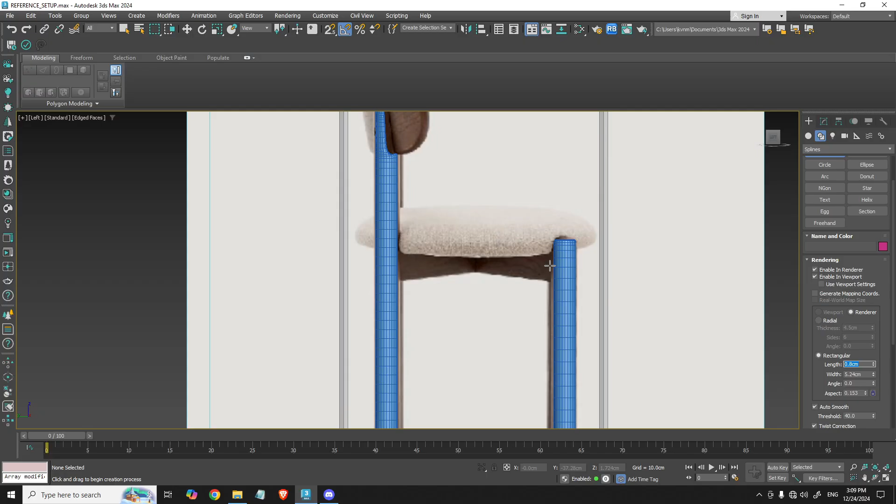I will just go on the left view or on the front, basically wherever you like. And I will take a line, which I have set to be on rectangular, at 0.8, and I will drag this up until a point, let's say here or whatever, doesn't matter.

I will go on the top view and I will turn on the angle and I will leave this on 45 degrees. And I will place this somewhere right here. Maybe you can increase the length at 1, maybe 1.2.

We don't want this to be a perfect match, so it doesn't really matter. It won't be much visible anyway.

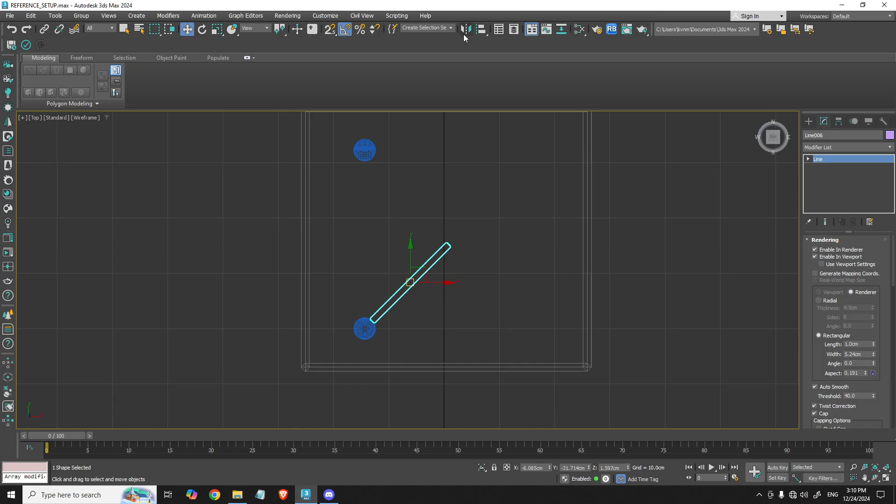And now one more thing you need to do is that you need to create another one for this part right here. So in order to do this, you can just select the mirror option up here, and instead of no clone at the x-axis, go for copy.

And drag this up until the point this meets our geometry, right there. And of course you can then go and maybe manually bring these two closer.

Pretty simple, right? Something like that, basically.

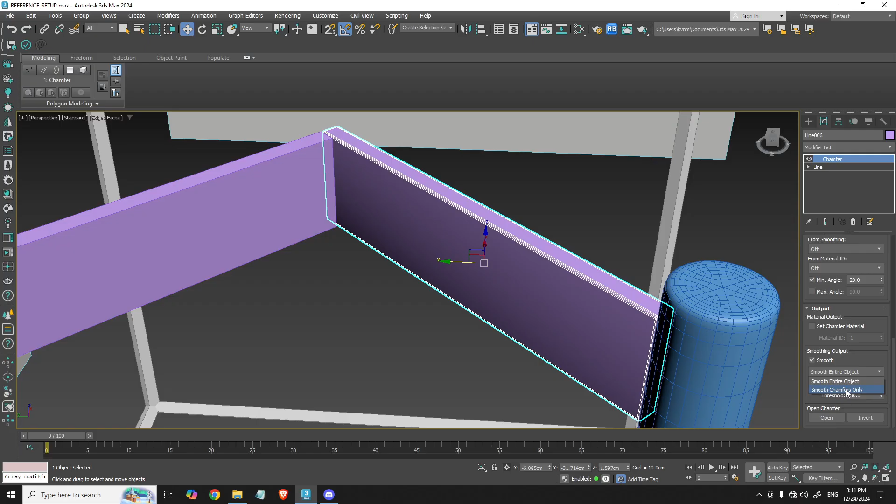And I will, of course, then add a chamfer, because we don't want this to be just a flat surface. 0.2 maybe, point. Add some extra segments and also set the smoothing output to smooth chamfers only.

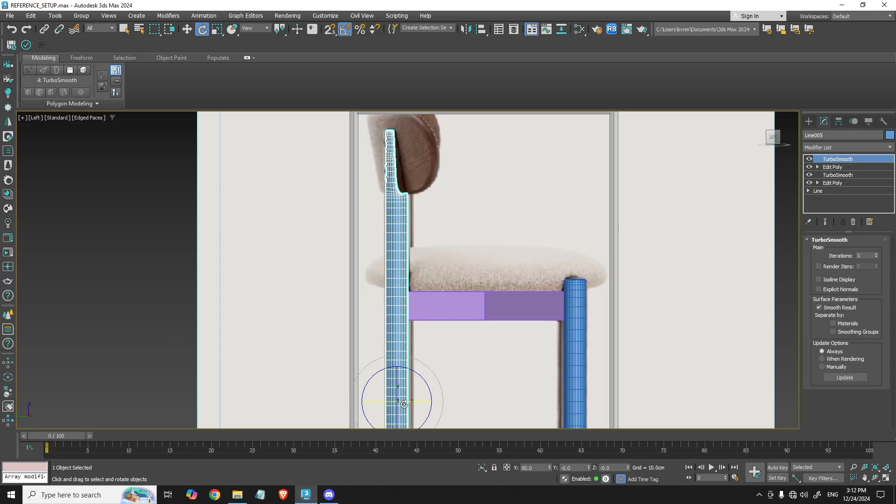I will just right click and copy this, and I will paste this right here. Alright, one more thing. I want to go on the left view and rotate this, actually on the front view, and I want to rotate this at 45 degrees, so this part looks like that.

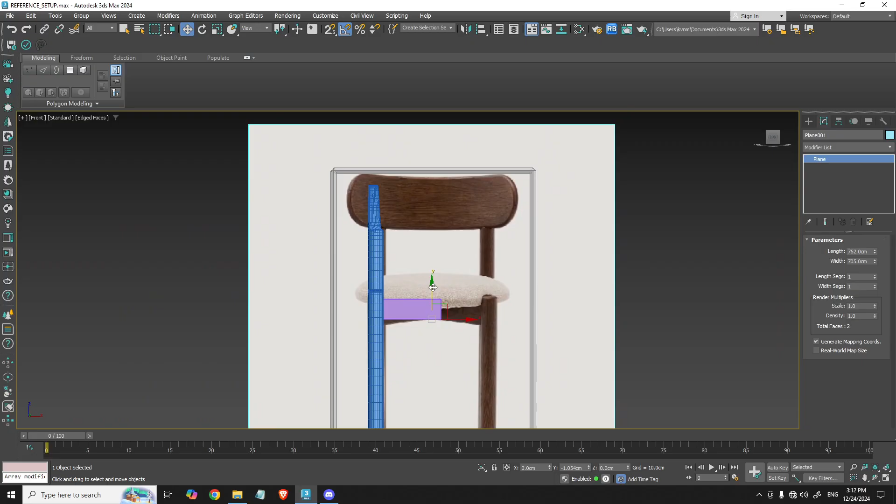So we are at 45 right here. And actually, we need to bring this image lower, something like that. And maybe we could... no, let's leave it as this.

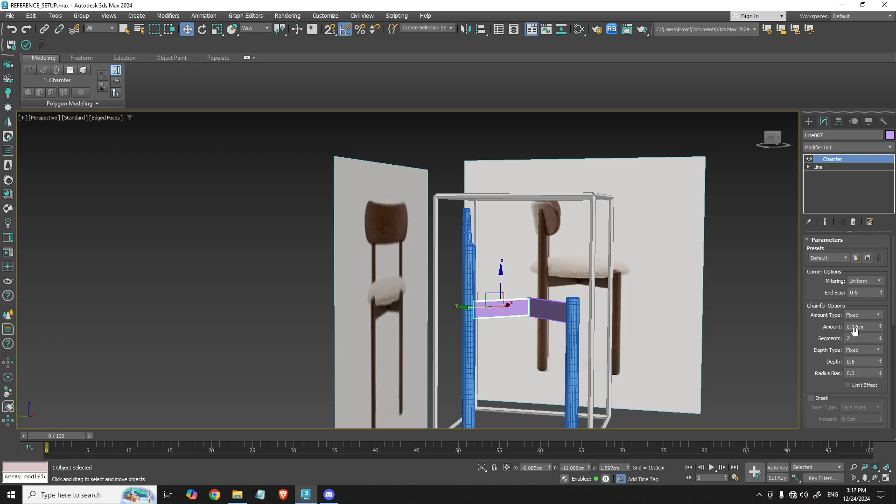Yeah, actually I will make this thicker, maybe at 6. All right.

And then you might wonder, what are we going to do with all of that? Well, I am going to select them and I will mirror them. Once again, I will keep a copy at the x-axis and I will move them

to right to match right here, and I will manually take this one and bring it right here.

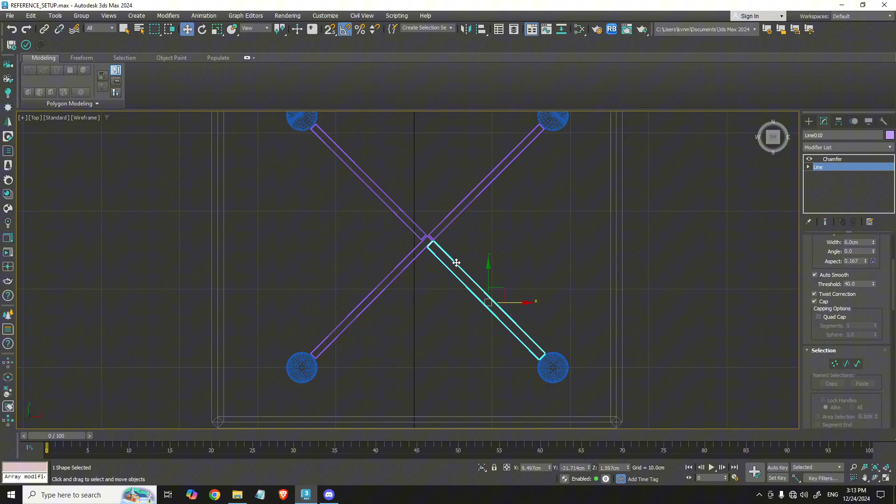Now I'm pretty sure that's not how this is manufactured as a furniture, but it doesn't really matter because no one would be able to see this connection right here. So don't worry about that.

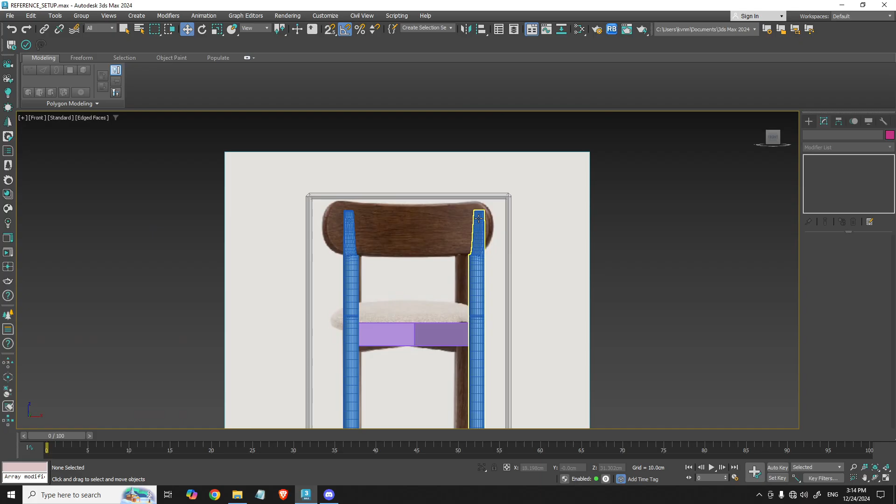And now let's move on with creating this, the back of the chair. So this is pretty simple.

I will just take a plane and I will add few extra edges on it. I will increase the width, something like that. And you might have guessed it, we will use a Turbo Smooth.

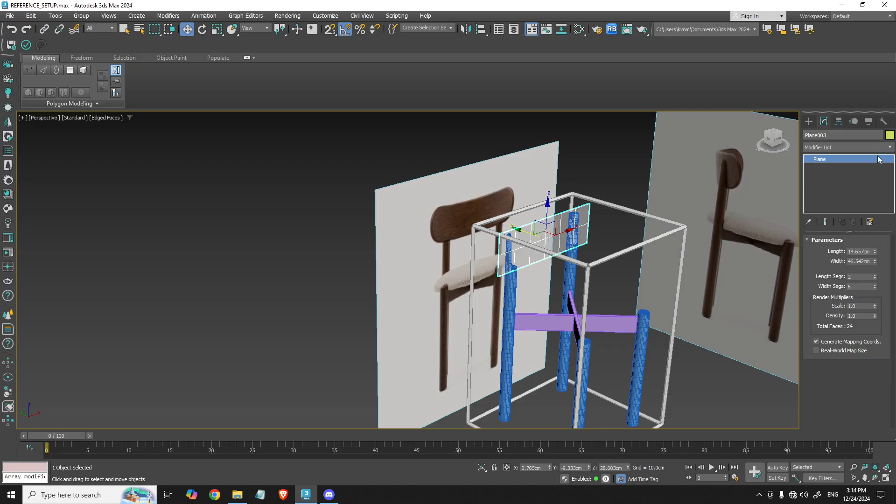But before the Turbo Smooth, we will actually go and apply a bend modifier, which we need to do some trial and error to find where we want it to go.

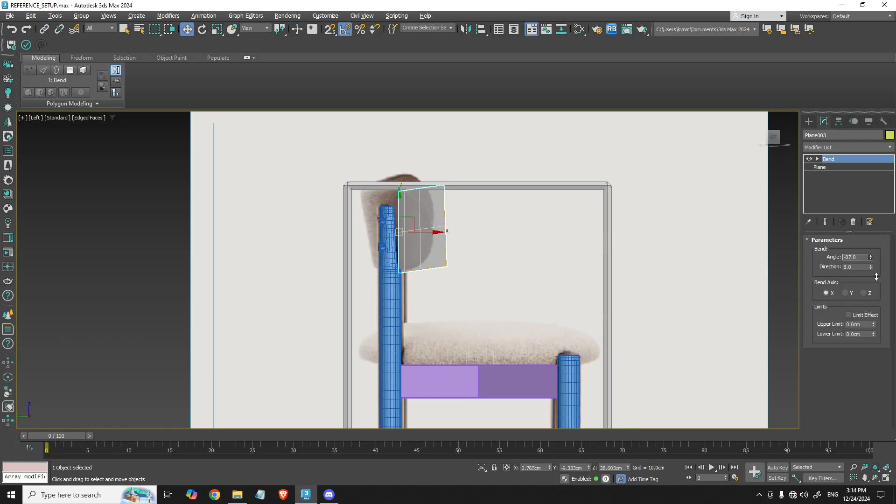I always get confused with the bend modifier. Maybe rotate this a bit, something like that.

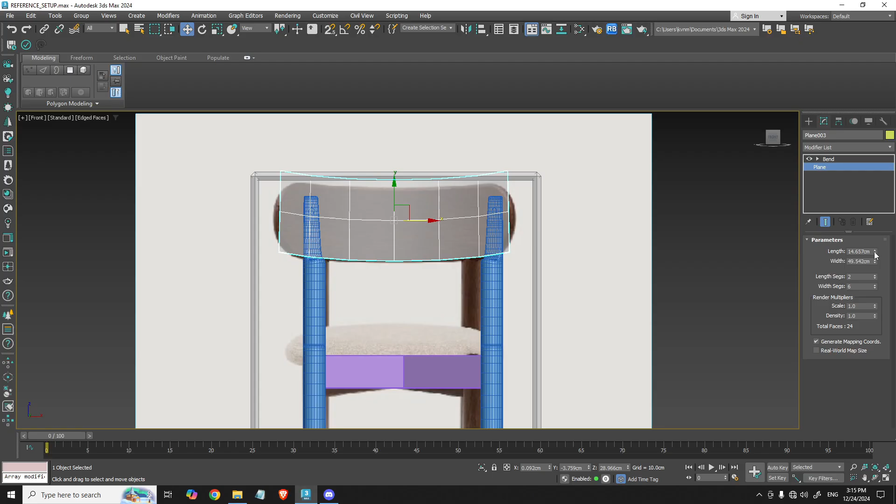Yeah, I think we are pretty close. But we need to make this bigger. I think something like that.

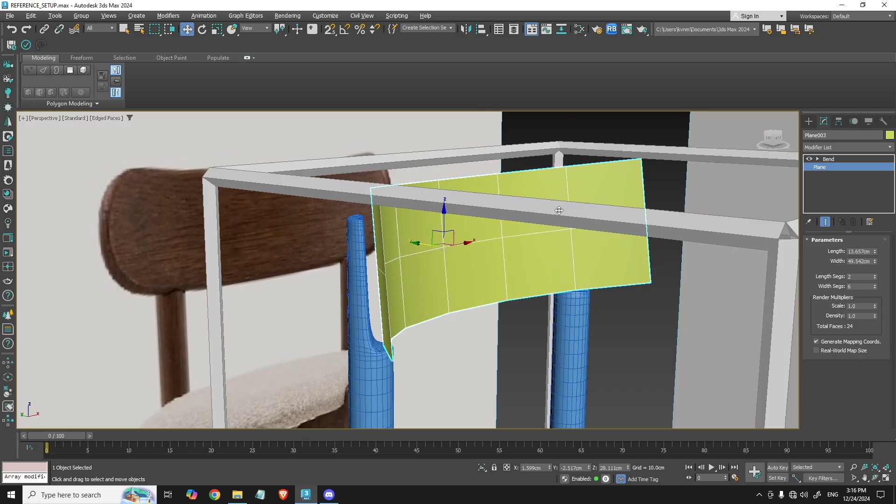Here we go. And I will actually go and apply a turbo smooth, and as you can see, nothing significant, nothing important changed.

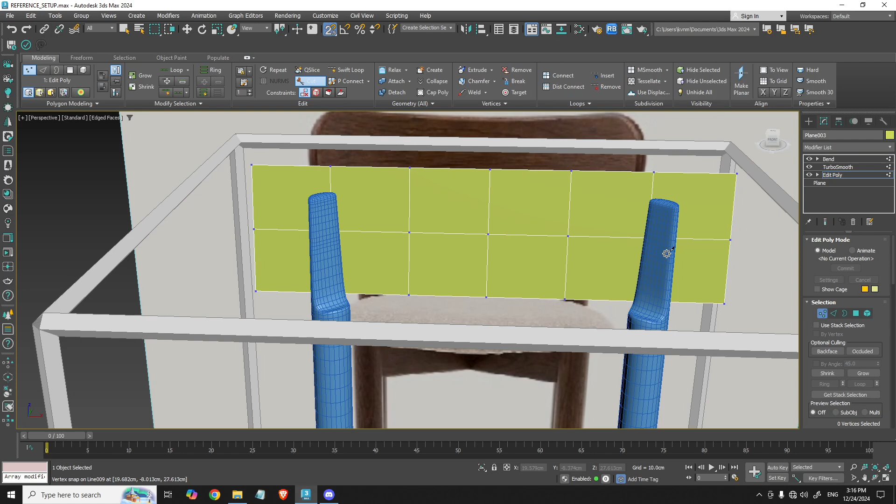And I will add an edit poly, because what I want to do is to go right here, connect them to help turbo smooth do its job correctly.

So turbo smooth, as you can see, it got fixed, but right here it looks like we missed something. Yeah. Let's target it

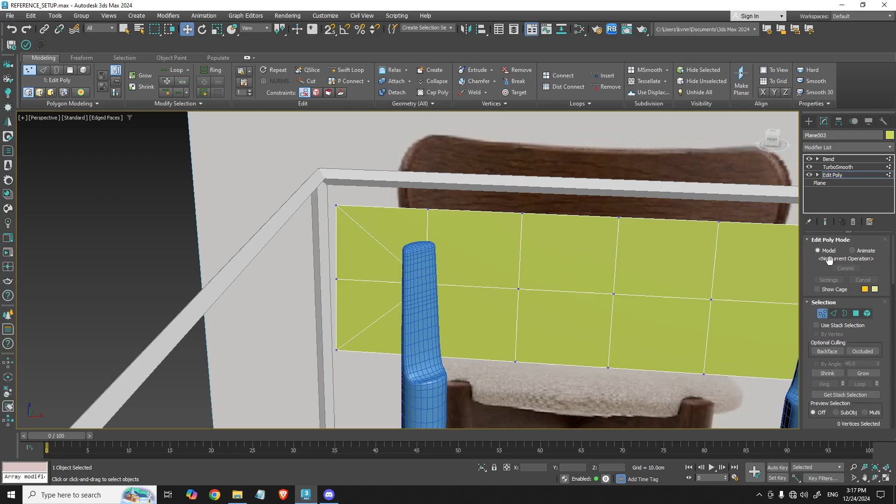there. Yeah, bend. Make sure to deselect the vertices. Bend.

And then maybe you can just apply a Shell modifier.

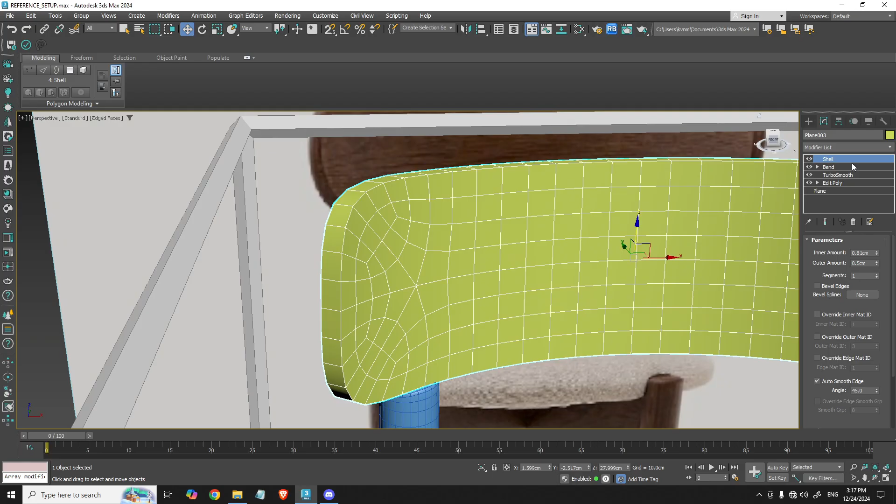And do something like that. What will happen if we apply turbo smooth now? No, I don't like this result, so let's keep this turbo smooth at 2.

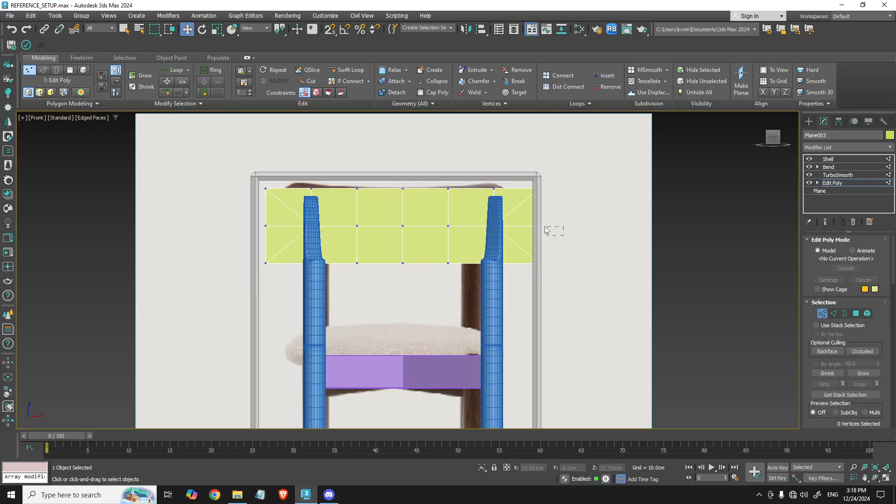I will manually go and fix a few things, like we want this part to be a little bit on the outside, just like that.

Okay, and I will go and apply a chamfer modifier, 0.1. Also, don't forget to fix the min angle so we can remove this part. Okay, let's make sure everything is correct. All right.

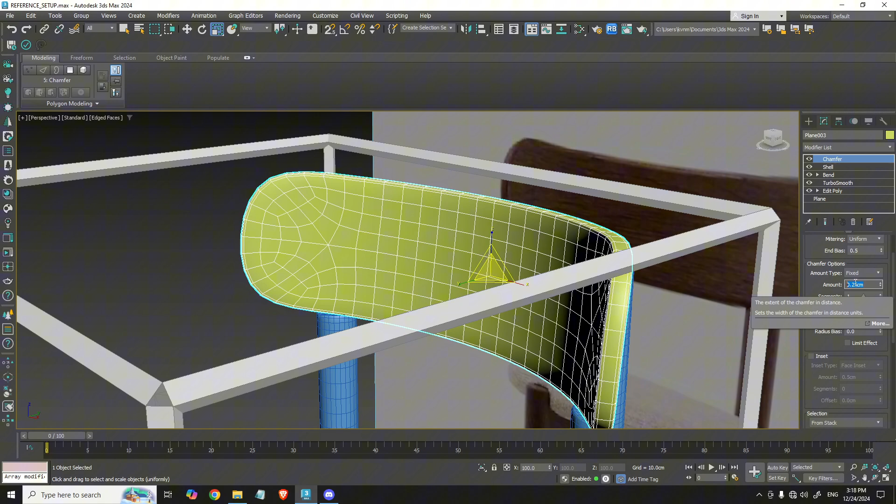Maybe 0.25, 0.5, 45. Yeah, I think this is better. Add some segments. Smooth chamfers only.

Of course, we can go and add some extra thickness to this, and move this down just a bit.

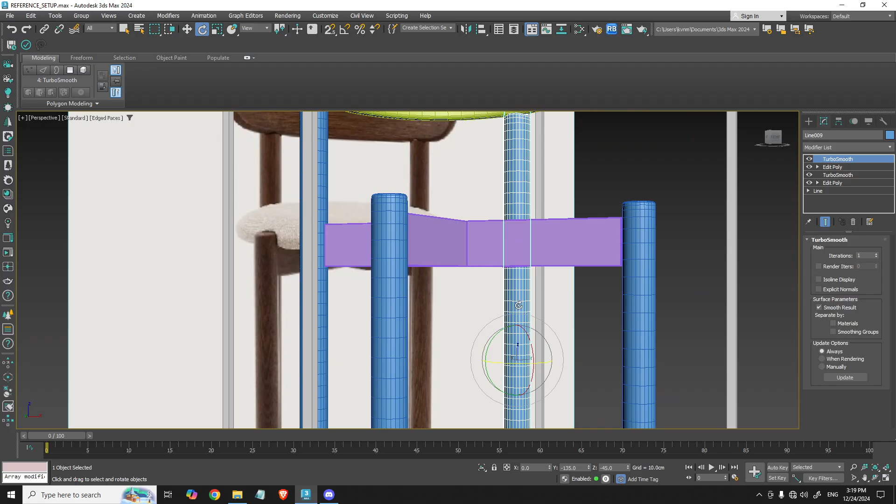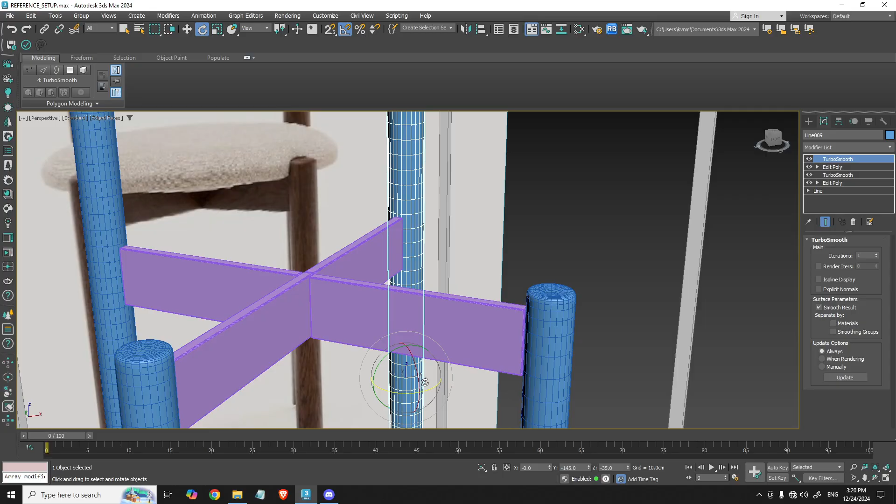Maybe we should actually cheat a little bit and rotate this, let's say right click at 5 degrees, maybe, or 10, 15. Yeah, that's better. 5, 10, 15.

So just like that, we also got the back ready. And now it's time to create this seating.

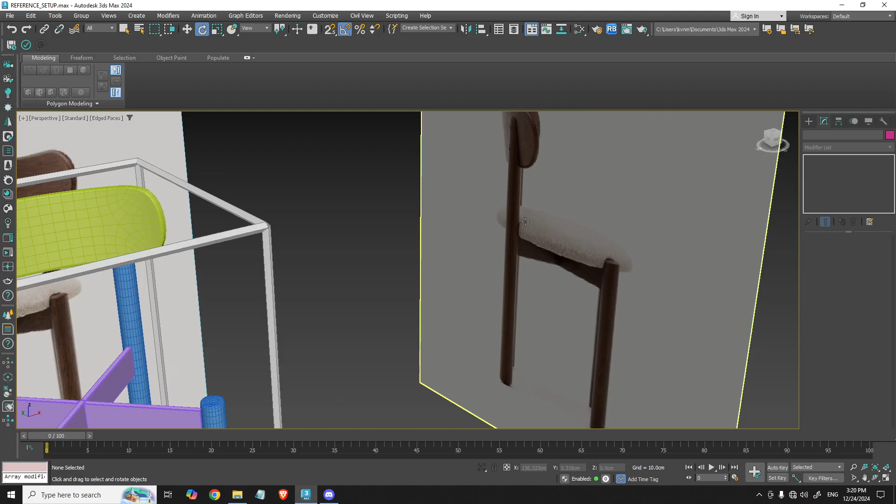Now this is pretty simple. I will go on the top view. I will take a cylinder, I think. So right here, I went on and created this seating because it turned out to be a little bit complicated, but I managed to do that. So here's how I did it.

So basically, it's just a circle. Here we got an edit poly, and then a turbo smooth on top of it. And if we go on the original circle, just one circle with 3 steps. So let's go and create it from the beginning.

Right here you can see how it looks. So I will just hide this. I will go on the top and I will go right here on the splines. I will take a circle and I will position it on the center.

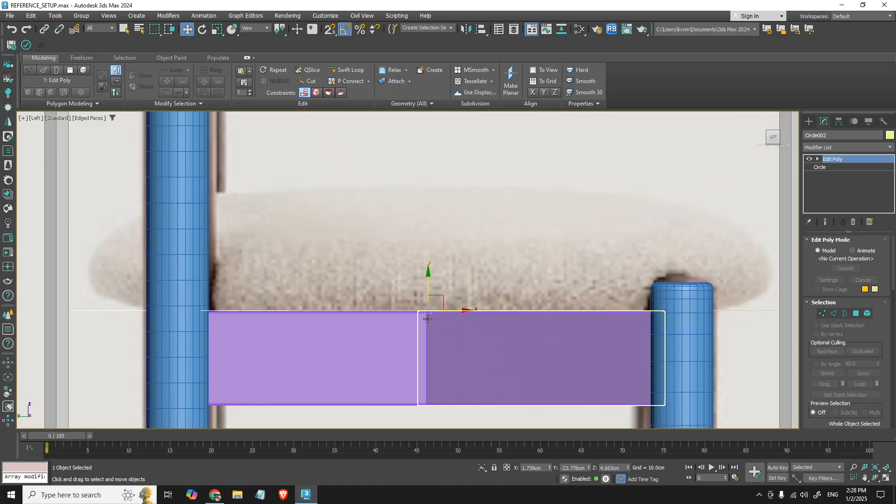Here I will set the steps to 3 and I will apply an edit poly to make this solid, right? And then I will go on the left view and bring this right above these wood pieces.

And here we are. Now we can maybe just go right here, go on the top and inset it just a little bit about here because I want this vertex to use it to push the fabric in later. Right here. And then I might also want to connect all of this together.

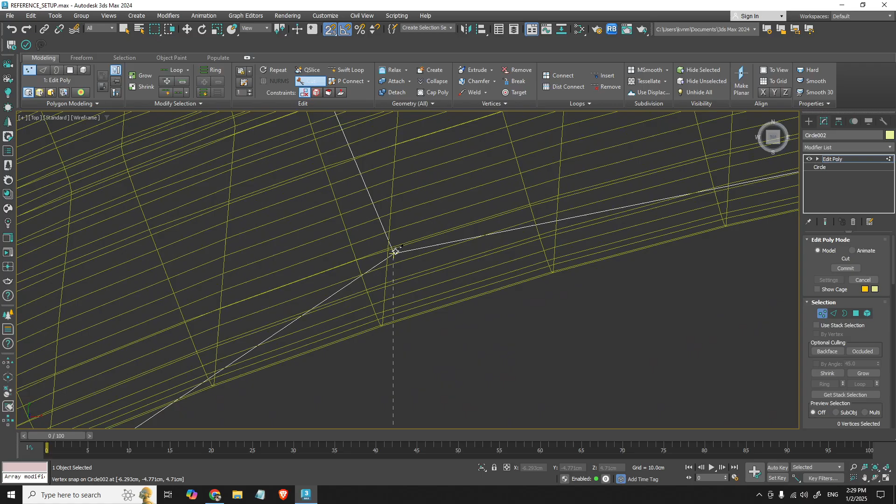So I will turn on the cut tool and turn on the snap. And I will start making these cuts to have my topology right. Just like that. Here we go.

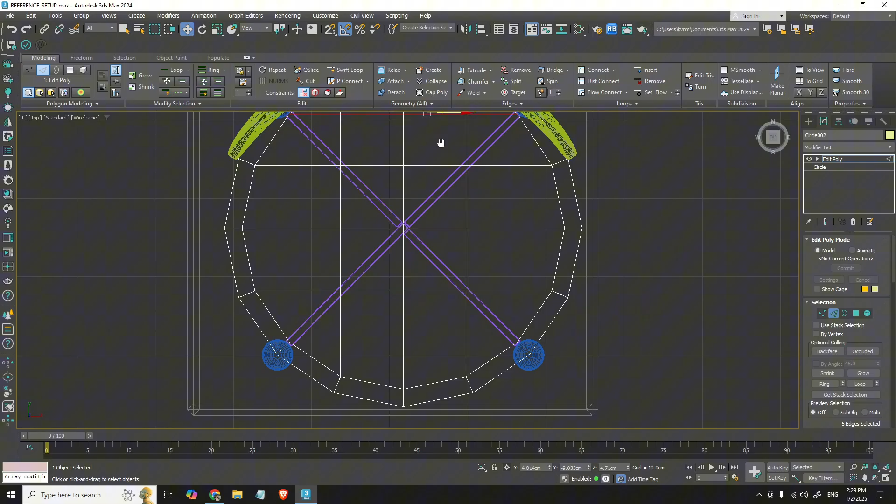Actually, we didn't need to do this one, so press Ctrl and Backspace. Just make sure to deselect this one. No, actually, just keep it because we do need it. Sorry.

Here we go, and basically, what we did before was that. Oops, let's go unhide all. Yeah, so basically, what I did here

was that I had removed these parts, and went and applied another one in it. Something like that. And then I went on and added a few extra.

Let me figure this out. Yeah, that's what I did. I go right here and I took a Swift loop and I applied some extra edges.

We need one more right here. And now we'll select these vertices. As you can see, this can be complicated at first, but once you figure this out, it's pretty obvious what you need to do.

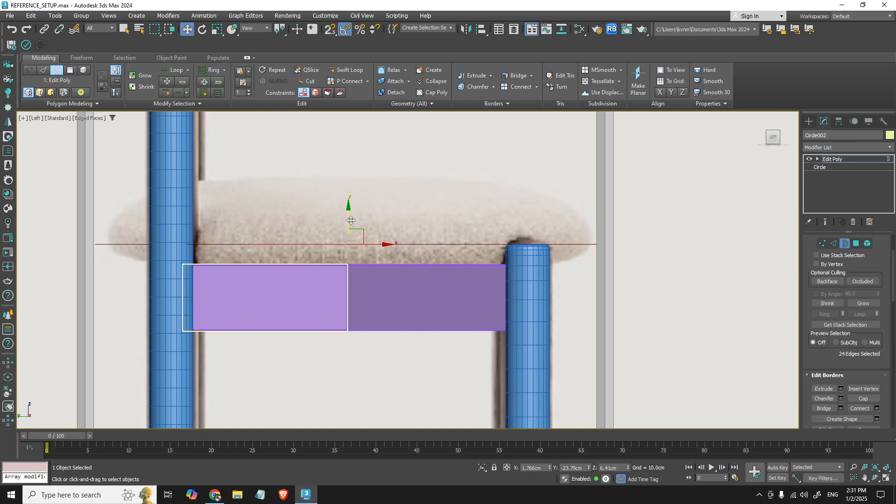on the left side I will select the border and I will hit shift and drag it right here. And then of course you can select all of these polygons right here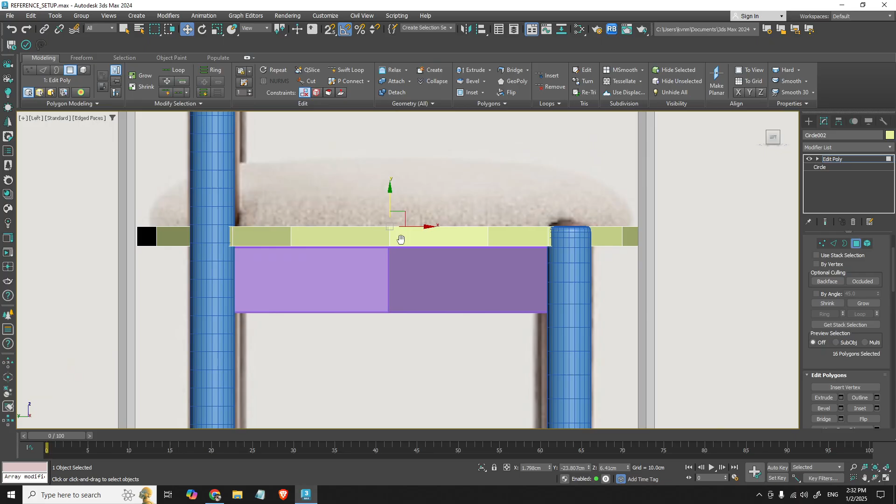and move them up to create this pillow effect. Hit shrink, do something like that.

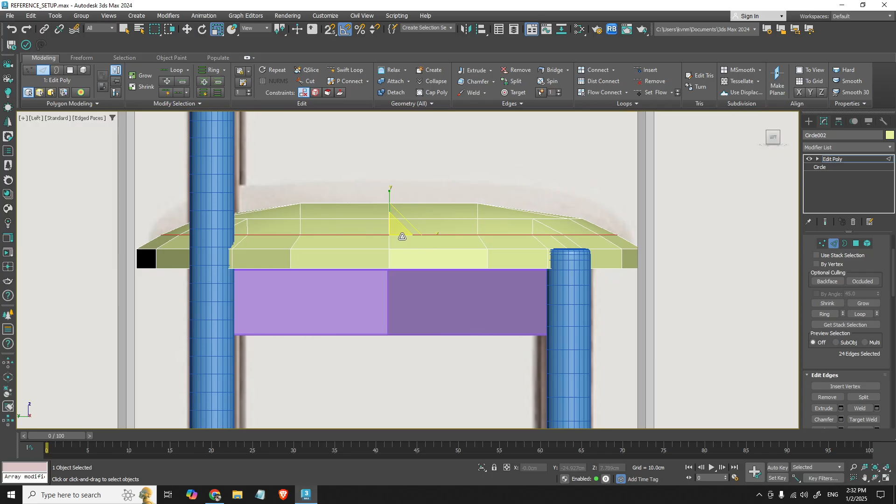Now I will also double click and select these edges, left view, and move them on this point right here, maybe.

It looks good. Let's apply a turbo smooth to see. Yeah, it looks pretty nice.

Yeah, and now it's time to select these vertices right here and here. I will go on top view and I will push them inwards. Something like that, I guess.

Or actually, a better way would be to go here individually, select the local pivot, go on the... let's find the right pivot for this. Yeah, local is the correct one. And I will push this inwards until I am happy with the result.

Let's go for turbo smooth on 2 because that would be the final pivot—the final turbo smooth, sorry. Yeah, this looks pretty good, maybe a little bit more, something like that. Let's go on this one.

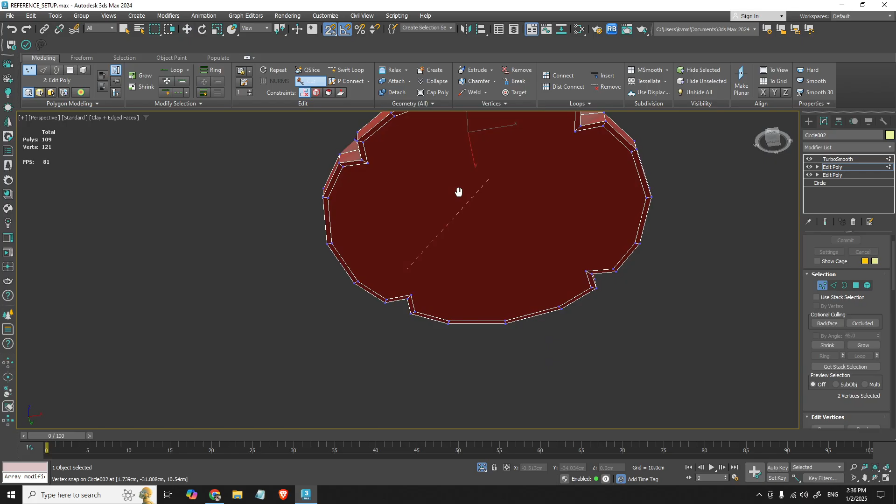And of course we need to go and connect these edges. Let's hold left click and select this 3 vertices. This is not the same way we connected the part up here, but it doesn't really matter.

Connect them and let's see the final result. Yeah, it looks pretty smooth. And isolate. Let's hit unhide all so we can delete the previous one.

And just like that, the seating is ready. You can go and make it thicker if you like. Do something like that.

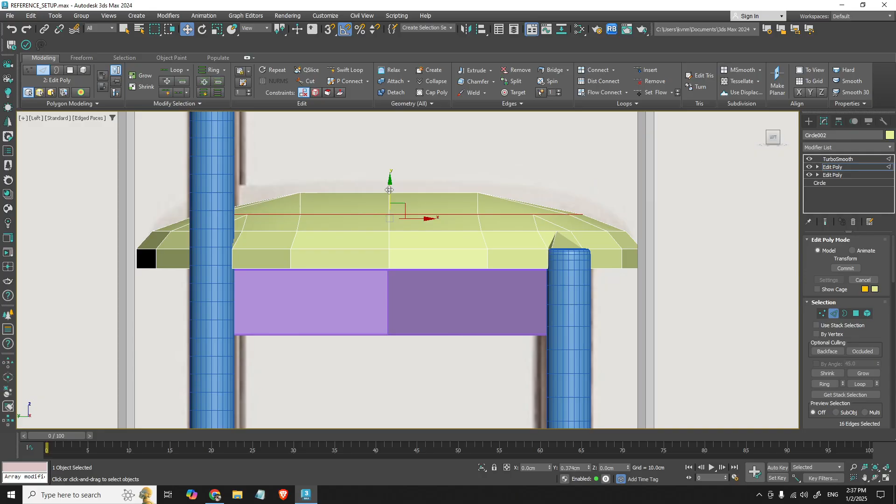Left. Bring it up just a bit. All right.

And now the final part is to create these little bolts we are supposed to have on these openings in the chair. This is pretty simple.

You just need to go on the edit poly right here and select this, the cap right here, and hit right click and create shape. Choose linear and then take this one, right click, convert it to an editable poly.

Let's select the local pivot, bring it forward up until this point maybe. And I will also want to make sure this is flat, so I will hit this, and also I will flip it to have the front side right here.

Now of course we need to inset this. Let's go for 0.2 and 0. No, this is too much. Let's go for 0.3 or 0.25.

Yeah, that's better. And I will also take a swift loop, add one extra edge right here, and I will extrude this to the inside right here, and...

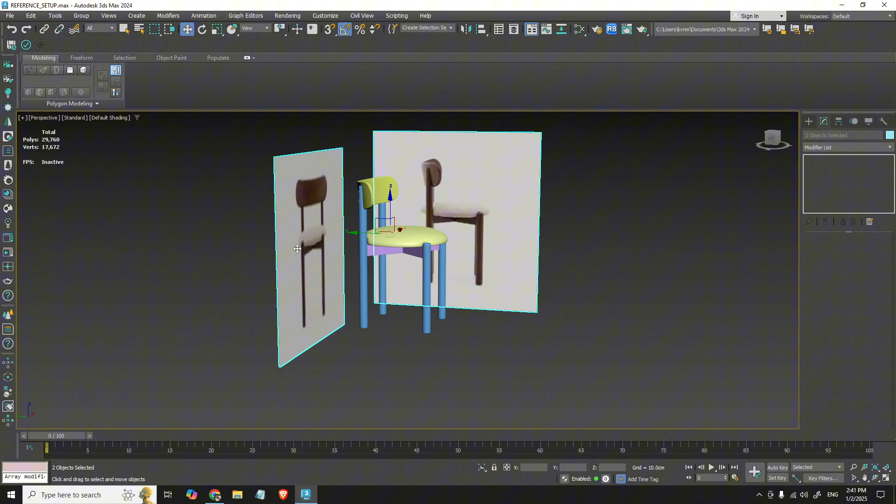And just like that, our 3D model is ready. So I will delete this reference box because we don't need it anymore. And I will also go and delete these reference images. We don't need them. So let's go and delete them. And now we are ready for the next step, which is UV unwrapping.